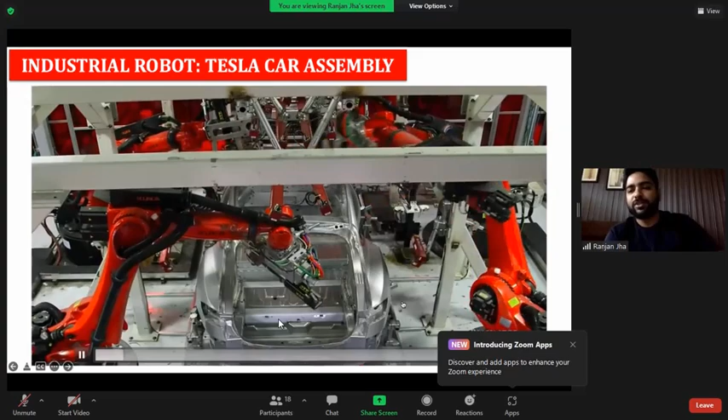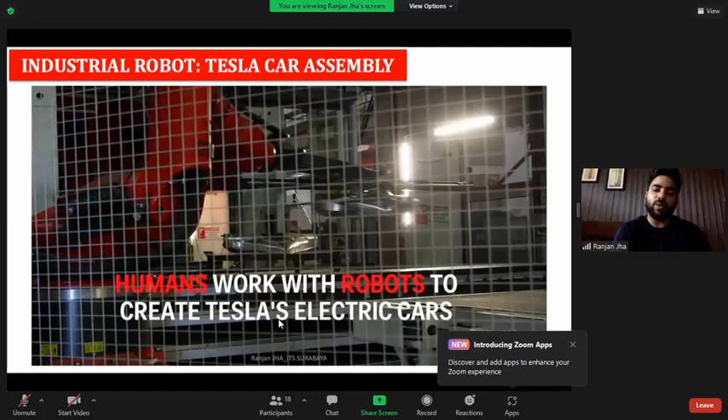So this is a Tesla car, Tesla, everyone knows, right? So this is a Tesla car assembly line. So these are the robots which are installed there for working. So this is the serial mechanism - I think you have learned a bit about this robot, the kinematics and all. So this is just to give a glimpse of what is the industrial application of the manipulator, right? So why do we install these kinds of robots in the assembly line.

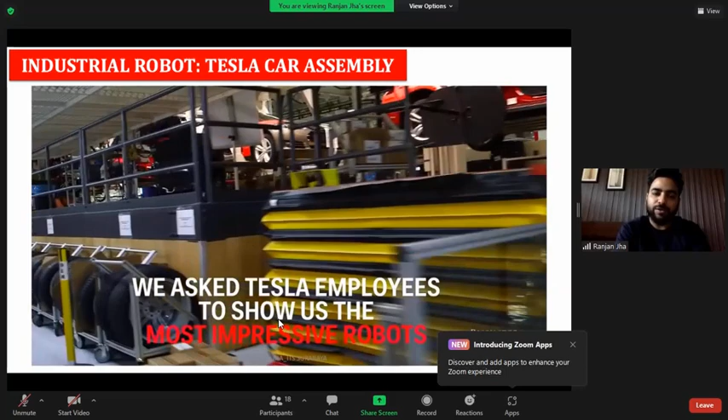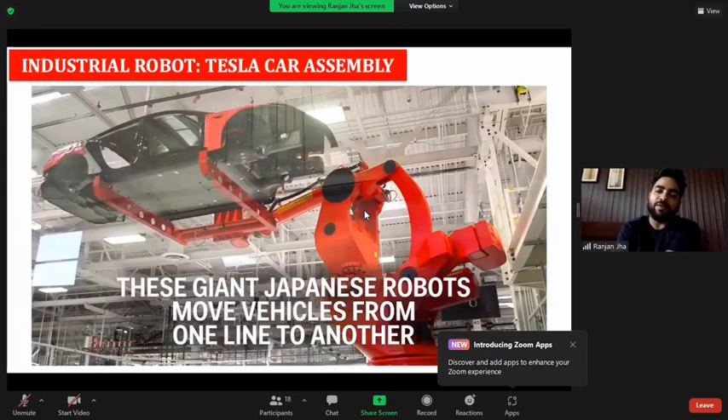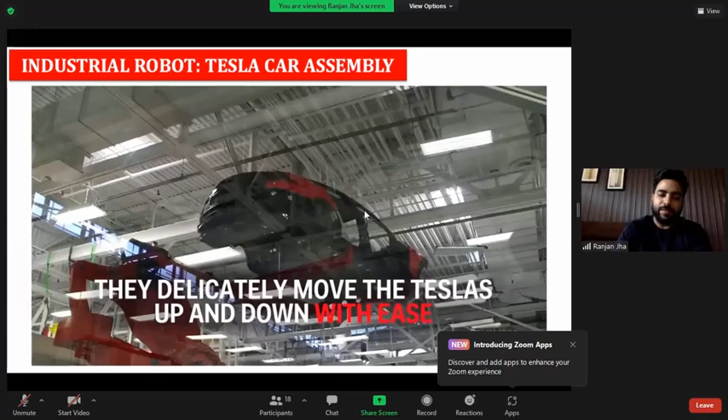So if you observe, the payload is very high, right? So it's very difficult for humans to manipulate this kind of payload. That's why we need this kind of robot. And again, in the assembly line, the company's target is to manufacture the maximum number of products, right? So these robots help to maximize the accuracy and the productivity of the industry line. So you can see the manipulation here. I'll not talk much about the serial mechanism, but we'll jump to the parallel one.

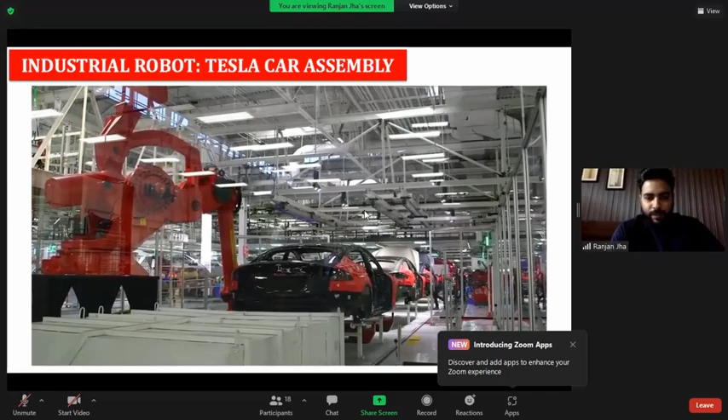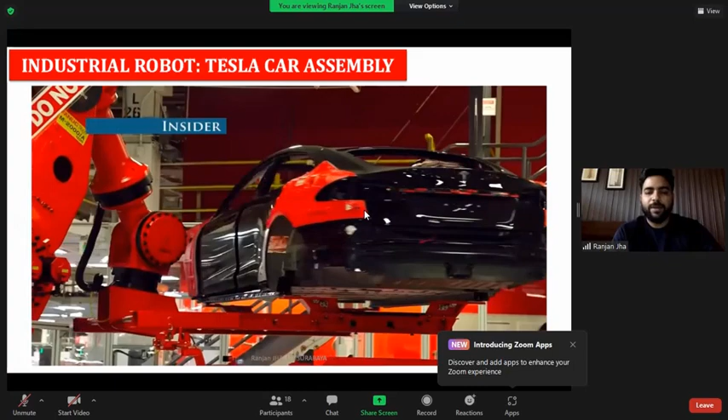So if we go a little bit into mathematics, I have added a few slides for the introduction to the mathematics behind these kinds of robots. It's very important to write the programming for any robot, and it's important to mathematically model it. I think you've learned how to model an object or system so the robot can understand it, mainly to denote a point or object in three-dimensional space. Since this is your last semester, I think you're already well familiar with these tools, so I'll skip these parts.

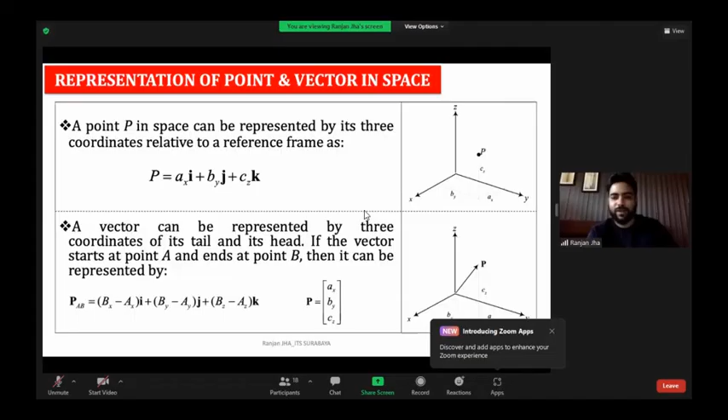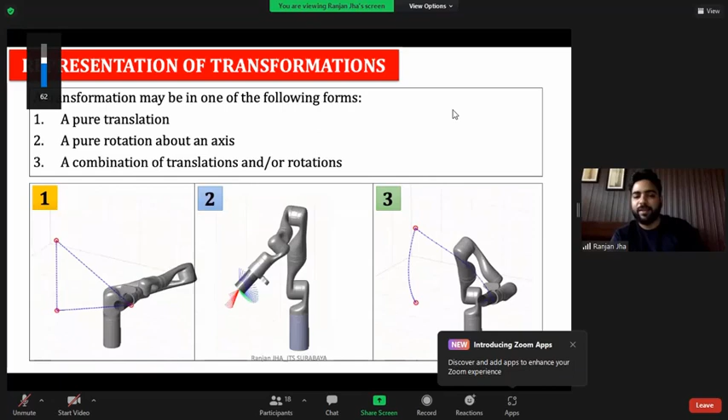So these are the three motions which give us all different kinds of motion: translation, rotation, and then hybrid motions. And then there are transformation matrices. Suppose a robot has to move an object from one point to another, so we use different kinds of matrices or mathematical formulations to model that. So don't worry about all this.

We'll directly jump to the parallel one. So before starting the parallel mechanism, I'll talk a little bit about surgical robots. You may have heard about the Da Vinci surgical system.

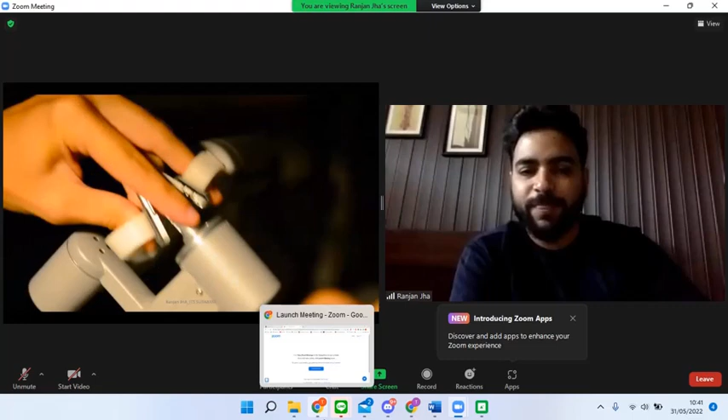This is for teleoperation—a surgeon can sit anywhere in the world and operate on a patient for different kinds of surgical procedures. So this is one kind of mechanism, and here also there is a parallel mechanism inside it. It's a hybrid, a kind of serial plus parallel mechanism. Now in many countries people are performing surgery using this device. You can see how well the hand manipulation of the surgeon is transferred to the patient side. So this is the current trend of the Da Vinci surgical system, what we have seen.

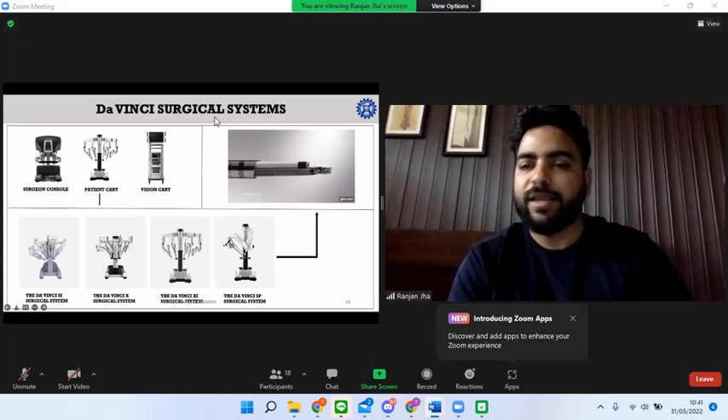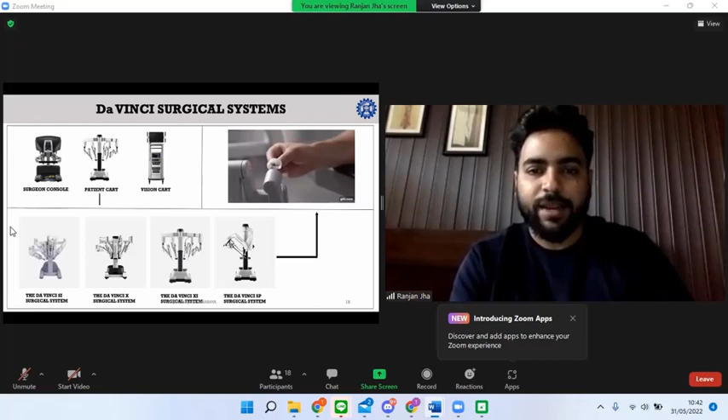But now, I've put this one—this is a snake-like robot. Before, there were 4 incisions needed to perform the surgery. Now with 1 incision, all the tools come out. So there is only one trocar, from which this kind of snake-like robot comes out and performs the surgery. This is the current trend of the surgical robot—with 1 incision, these 4 tools come out and perform the surgery. So these are a few things we are doing in the development of surgical robots.

Here, a few things—the handheld device—and I'll show you one video just to help you understand. These are a few things we have developed here in our lab with the tool also. Let me show you a video. Okay, this video is not working here. No problem, I'll show you from here. This is the surgical tools which we have developed. The video is not working, maybe I'll show you later.

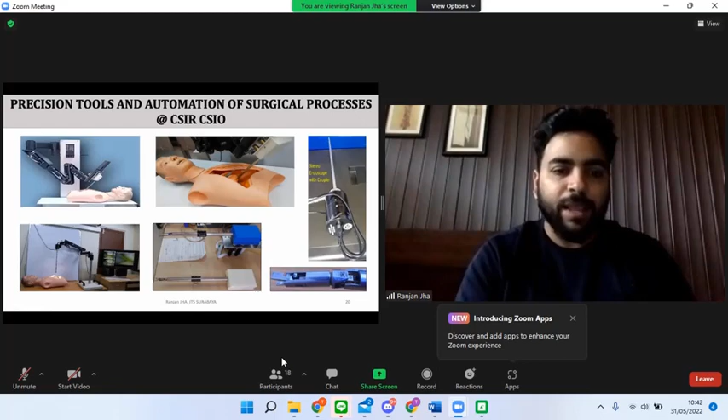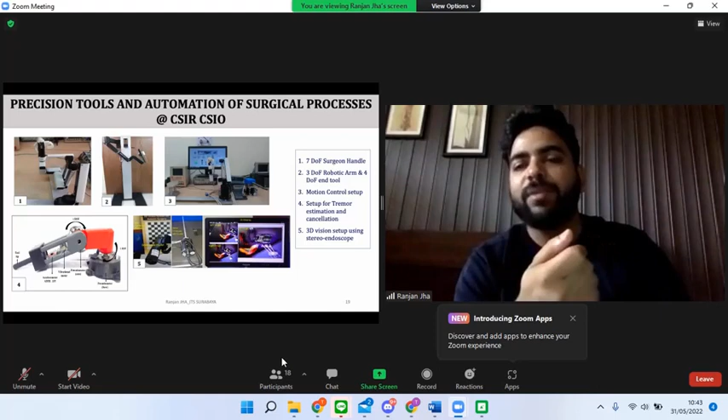So we have transferred the handheld motion to these devices—you can see in the second one, and we've also developed a fourth one shown here. While performing surgery, there is a tremor in the hand of the surgeon. It's very important to remove this—imagine if he's doing surgery and his hand moves, what will happen to the patient? So it's very important to filter out the tremor. We have developed one device to filter that tremor of the surgeon's hand. I'll show you this video at the end.

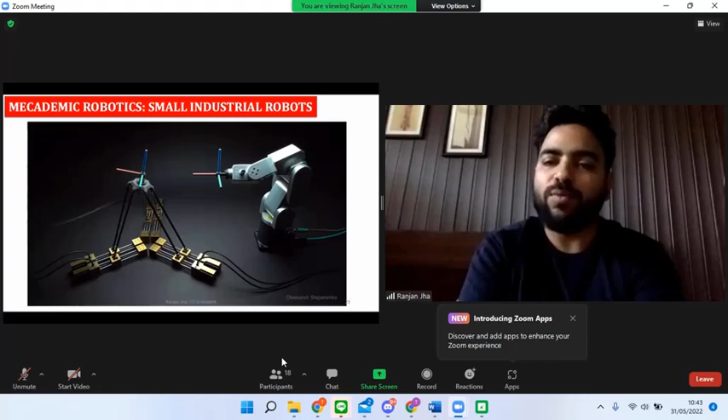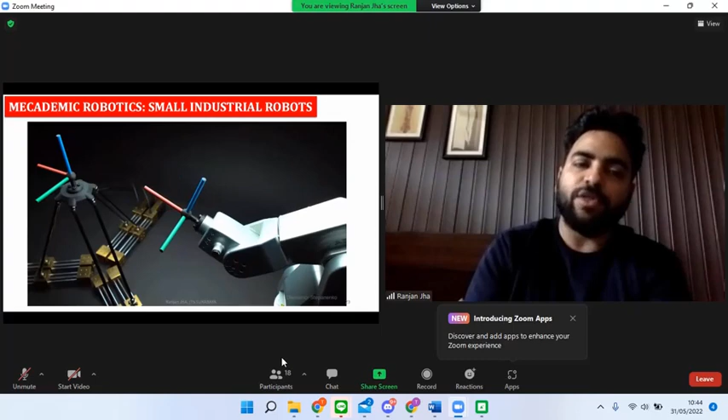Okay, so we'll start with the parallel manipulator. I'll give a glimpse of the comparison between the parallel and serial mechanisms. This is a parallel 6-axis parallel robot with linear actuator joints. In a later slide, we'll take one parallel robot and try to understand its mathematical model. You can see here the motions of the serial mechanism, and one can understand the difference between the two. Then you can think about which application suits which mechanism.

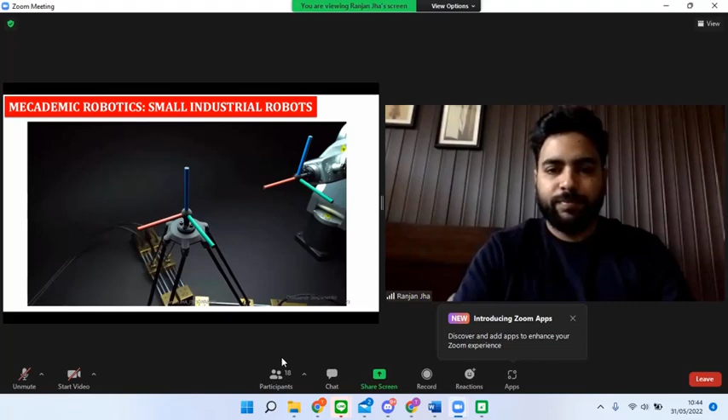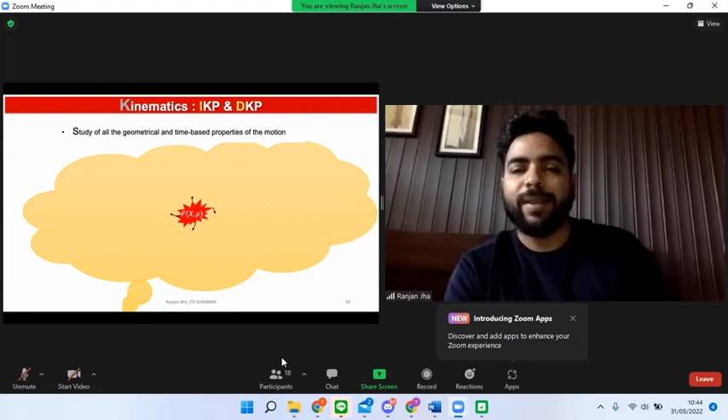Now let's try to understand a few terms before jumping into the parallel mechanism. There is something called the constraint equation—we'll see what this is. There are two important terms: the workspace and the joint space. With these constraint equations, for example, if we represent any object in three-dimensional space, it has 6 degrees of freedom—three translations and three rotations.

The set of all possible values of these variables we call the workspace. And then the joint space—you take the actuator. If you're taking a linear actuator, you can denote it as rho, or if you take a rotational one like a simple motor, you can take the angle of that particular joint.

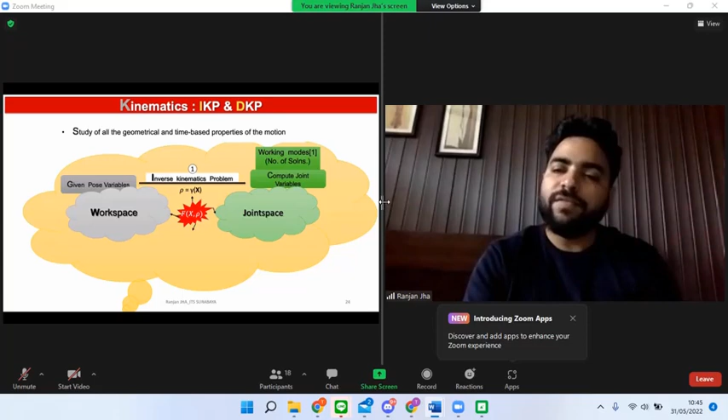So if you plot all the points of that actuator, we call it the joint space, right? For a given pose variable, for a given particular value in the workspace, when we calculate the articular variable or the joint variable, we call that the inverse kinematic problem. I think you know these terms now. In the later example, we'll see that solving the inverse kinematics will not give one solution. It will give different solutions because of the algebraic equations, right? So we call that number of solutions the working mode of that particular robot.

Similarly, for a given value of the joint, like the given value of the motor rotation or the linear actuator, when we compute the workspace, that is a point in three-dimensional space, we call that the direct kinematic problem, and the number of solutions we call the assembly mode. So these working modes and assembly modes we'll understand with an example, right? There are also singularities; we'll see that one too.

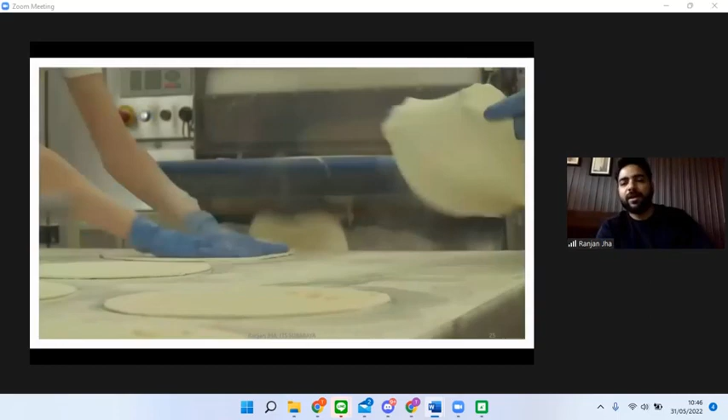So this is again one video for the parallel mechanism. Before we start, let's get a feeling for this parallel robot. This is for making pizza, right? You can see the different applications of the manipulators, the robots. This is one kind of delta robot which is used to make pizza. You can think of any number of applications for different mechanisms. This is one of them.

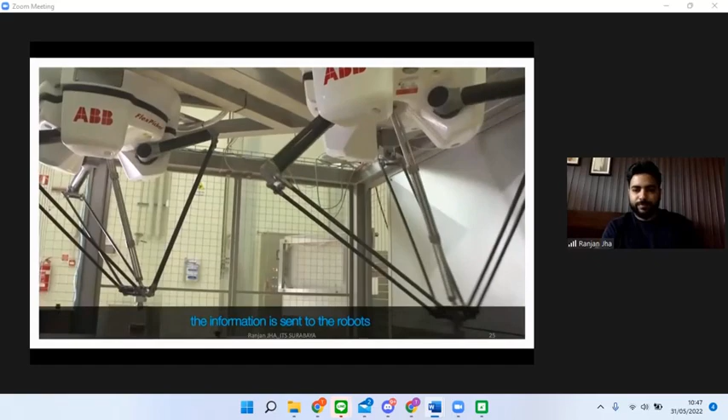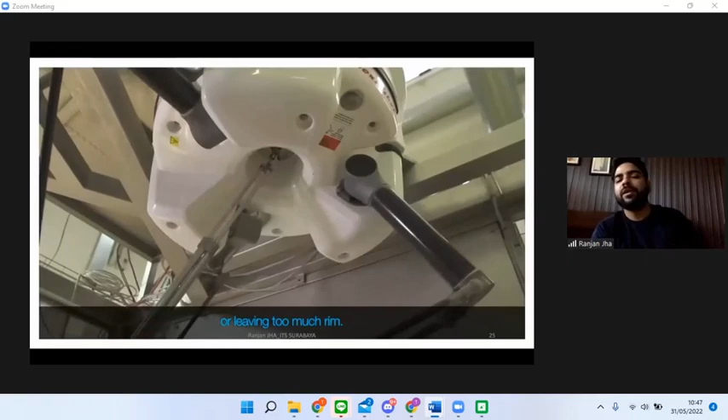So the simple definition of a parallel mechanism is: if you have more than one link connected with the end effector, we call that mechanism a parallel mechanism, right? When you have a closed loop.

Okay, so we'll just, 1 second. Okay.

So let's start with a delta robot. We'll try to understand it. Now suppose you take any three linear actuators. Just take three random linear actuators and think about how we can join these actuators in three-dimensional space. Based on that, we have formulated four different kinds of delta-like architecture. For example, suppose these actuators are perpendicular to each other. Just put these actuators on each axis, x, y, z. That mechanism we call the Orthoglide.

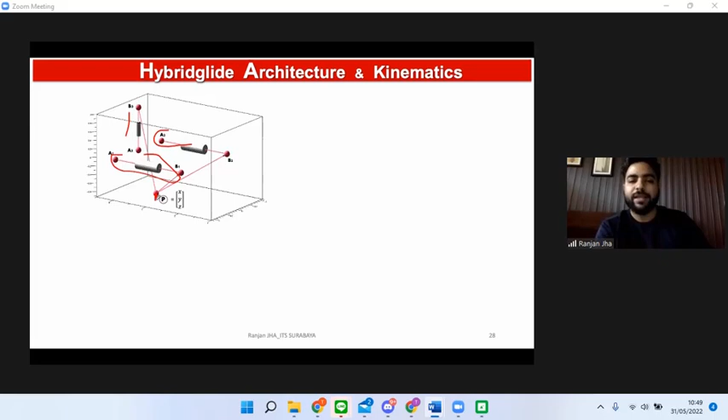So this is the end effector. For example, suppose we want to paint a surface, right? We'll fix a brush here at this point P. Now we want to model that. We want to make the kinematic model of this particular architecture. So let's start. Consider these points A1, A3 and A2. Let me show you the motion of this mechanism first. See, this is making a circle, right? These points A1, A2 and A3 are the 3 fixed points, and B1, B2, B3 are connected with the end effector, which is the moving point.

Now, how do we find the kinematic equations? If you see this point B1, if you know the point B1 and this P, you know XYZ, right? For example, let's take these values of the actuator. This is the linear actuator, right? Suppose this is rho 1, this is rho 2, and this is rho 3. This is nothing but the value of the linear actuator. Or you can take R1, R2, R3.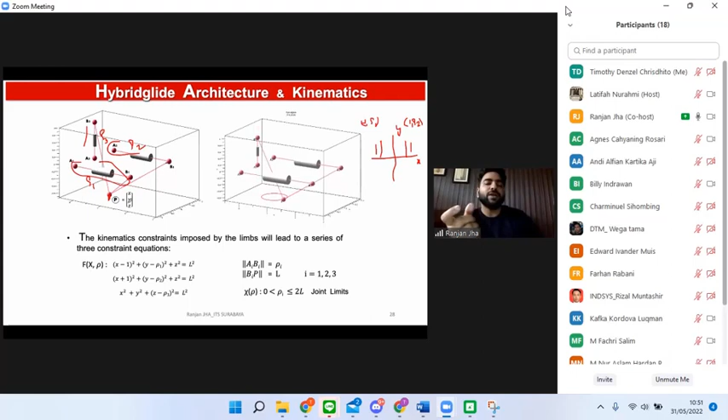So now we know these 2 points B1, B2, and we know this P as X, Y, Z. So the distance between the 2 points is what? X1 minus X2 whole square plus Y1 minus Y2 whole square plus Z1 minus Z2 whole square, and under the root, right? So with the help of these constraint equations, we'll arrive at these three equations. So this is nothing but the distance between point B1 and P. So B1P equals L gives us the constraint equation.

Now if you see here, X, Y and Z are the pose variables, right? In the last slide, when you plot this X, Y, Z, we called that the workspace. And then you have rho 1, rho 2 and rho 3. When we plot this, we called it the joint space. So X, Y, Z is the pose variable, rho 1, rho 2, rho 3 is the joint variable. When we want to calculate X, Y, Z when rho 1, rho 2, rho 3 is given, we call that direct kinematics. And when we want to compute rho 1, rho 2, rho 3 when x, y, z is known, we call it inverse kinematics.

So if you see these three equations, for example, if you know the x, y, z values, this is a circle, right? So we know the set of all the points. When we substitute these points in x, y, z, we can very simply solve these three, because now there are three variables: rho 1, rho 2, rho 3. By solving these, we can get the values of these actuators, how much we need to move each actuator to get a circular trajectory. With the help of these equations, we are able to calculate that.

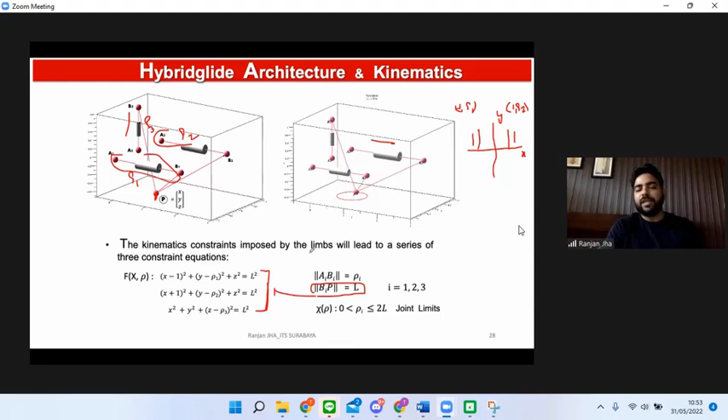Now we will go to the UraneSX. This is 3 perpendicular, but on different planes. This is very familiar, right? When you see 3D printing applications, most of the parallel mechanisms for 3D printing will be like this: 2 in the same plane and 1 in a different plane. So you can again write b1, b2, b3, and with the help of b1p equals L, you are able to write these 3 equations. So the motion is something like this. This we call the UraneSX, and the application is in 3D printing, or you can think of any different application also.

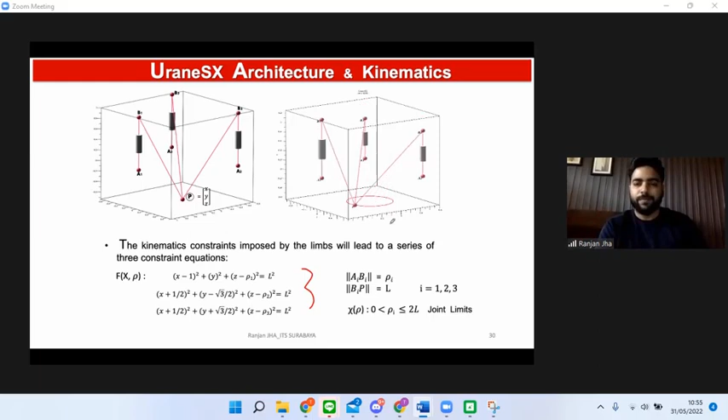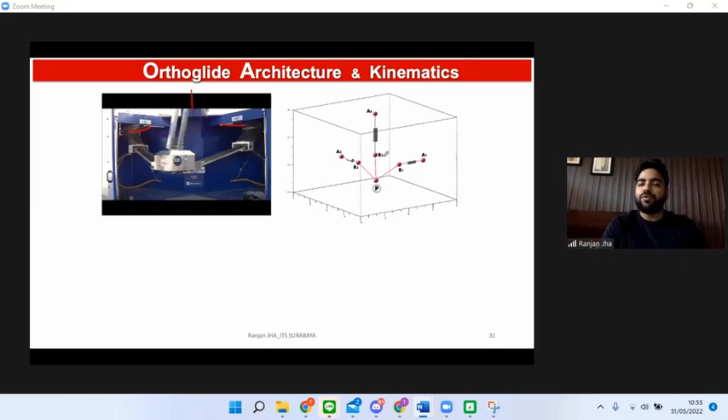Now let's go to the Orthoglide. This is a very simple one. This is one of the examples which we had at École Centrale de Nantes in France, this manipulator. When you place the actuators on the 3 axes, x, y, and z, you get this mechanism. So how to model that? The principle is again the same. You first find the points b1, b2, b3. This one is on the x, y, and z axes, so the points may be rho 1, 0, 0, then 0, rho 2, 0, and the third point will be 0, 0, rho 3. When we find the 3 points, we calculate the equation like this.

So this is a very simple equation. Here this is the constraint equation. Again, with the help of b1p equals L, we have found this equation. The points are rho 1, 0, 0; 0, rho 2, 0; and 0, 0, rho 3. Now with the help of these equations, we are able to write the inverse kinematics and direct kinematics equations. Now let's take an example to understand this, with the help of these 3 constraint equations.

What we got in the last slide. So when you find the x, y, and z from this equation, you will get these equations. You can solve this by hand also, but you can use any mathematical tool like Maple or MATLAB to compute these equations. It's not very difficult to find these equations. Similarly, the inverse kinematics, the inverse is very simple.

Now, when you compare the serial mechanism with the parallel mechanism, one can observe that here it's very easy to find the inverse kinematics for the parallel mechanism. So this is one of the advantages of the parallel mechanism, that you are able to write the inverse kinematic model from the constraint equation very easily. You can see from here. It's very simple: L square minus Z square minus Y square, under the root, then plus and minus X. So this is rho 1, rho 2, and rho 3, the inverse kinematics.

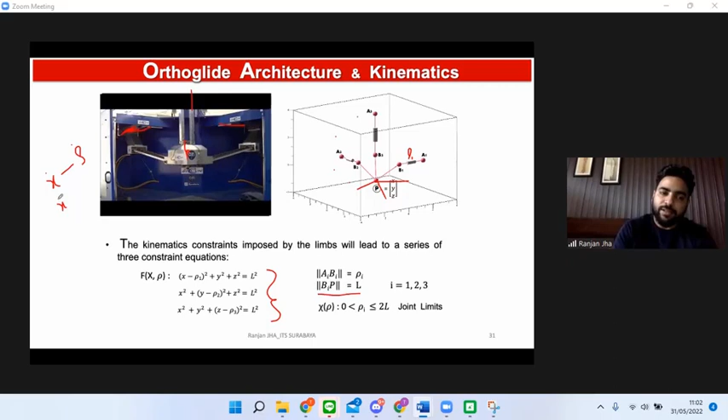Now, when you map the velocity of this actuator with the velocity of this end effector, when you map between x dot, that is the velocity of this end effector, to rho dot, that is the velocity of the actuator, or the double derivative, that is when you take one more differential, that is you are computing the acceleration, so that is double dot. So you are computing these values from here only.

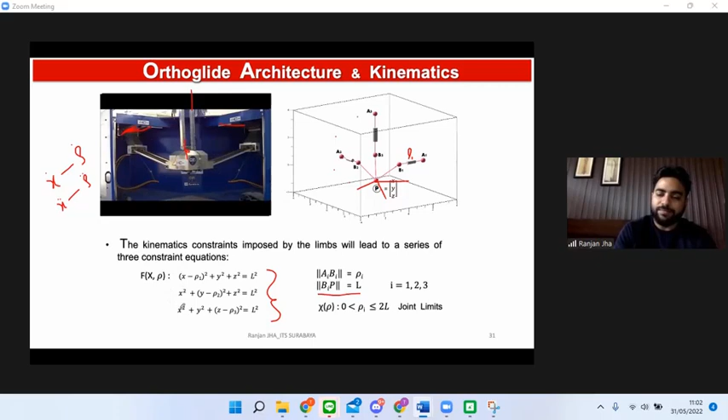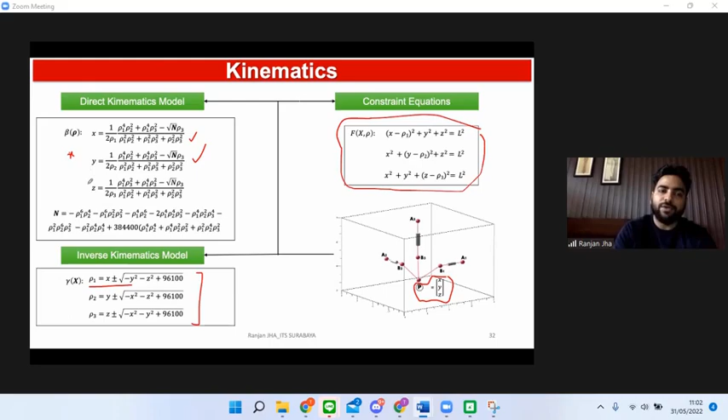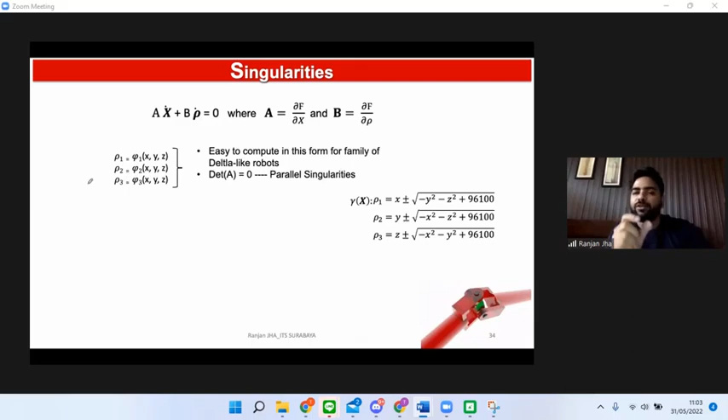So let's see this. So you know this x, y, z. So when you take the differential x dot, y dot, and z dot, we call that a Jacobian, the matrix which we use to map between the velocities of the end effector to the joint variables. Now these are the mathematical matrices. So when the determinant of that matrix becomes zero, it's very difficult to map those velocities.

That particular point we call a singularity. It's very important to know about singularities, because in parallel mechanism you can find singularities inside the workspace also. The physical meaning of this singularity is, at that particular point when your manipulator crosses the singularity, the stiffness of the manipulator will be lost. So for example, if your manipulator is moving, it will fall down. So it's very important to know that particular singularity inside the workspace.

So I'll not go much into the mathematics. For that particular robot, orthoglide, we have computed this singularity surface, which is inside the round one. So for orthoglide, it's like a sphere. Inside the sphere, you have these kind of surfaces.

So this is not the safe zone for any robot. We should give this value to the user that your robot should not move on these points. So whenever you want to make a trajectory, for example, if your robot wants to move from this point to this point, it should not move like this.

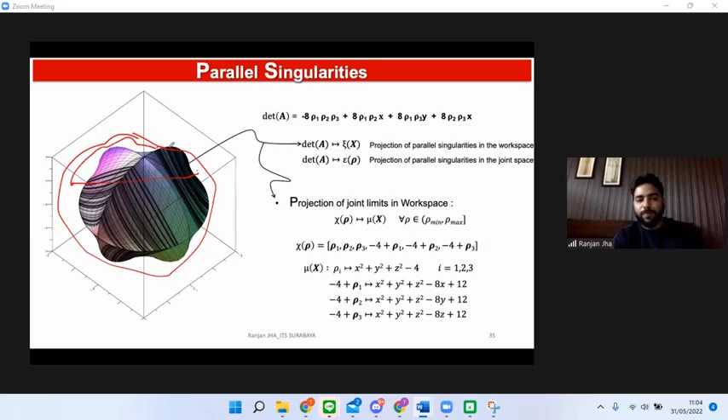So first you should ensure that it should not pass through the singularity. This is the second step in trajectory planning, which we will see also. So here, if just for the analysis, for the orthoglide, if you see the singularity in the workspace, you can see this surface and this surface. We'll see this again.

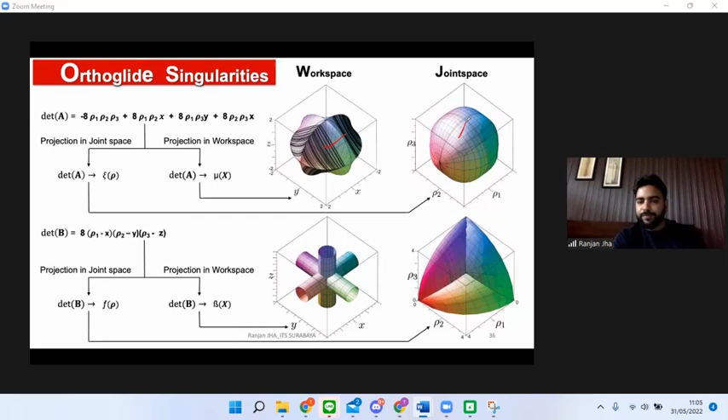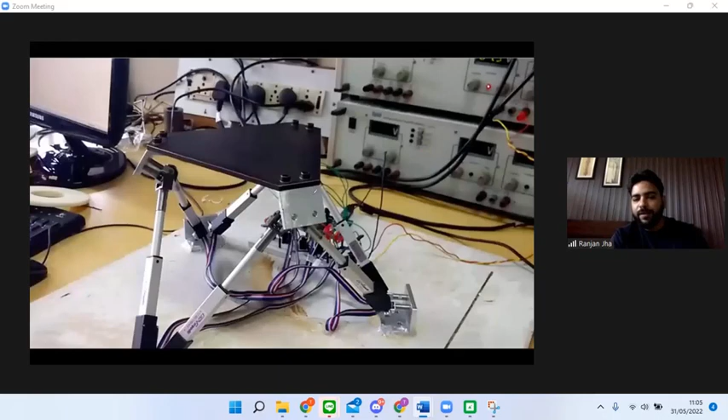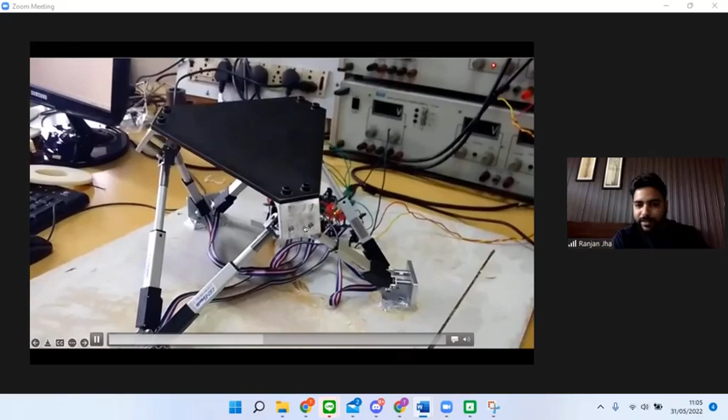Okay, so this is the video. You see, okay, so now at that point, when it falls down, it passes through the singularity. So when it passes through the singularity, you can see that here. Just 1 second. Okay, so here you can see, so when it passes through the singularity, it loses the stiffness and it falls down. That's why it's very important to know about the singular points in your workspace.

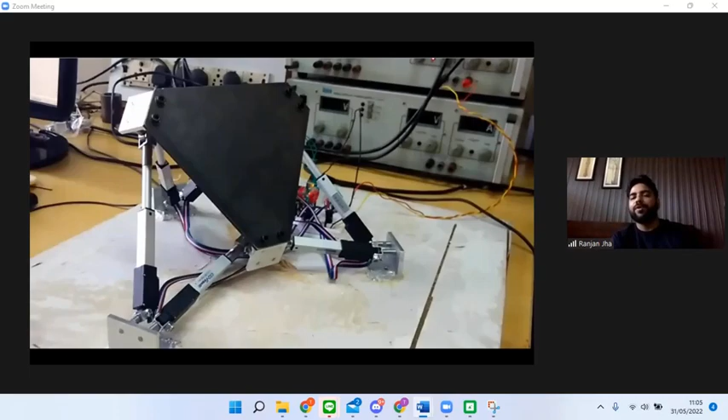Now in the trajectory, what we do, these are the parametric equations that we use to write it. I'll give you a little bit about what is the parametric equation, because sometimes you will find it useful.

So what we do, we write, let's suppose you have 2 points, A and B. This is point A, this is point B. So what we are learning now is about parametric equations. For example, let's suppose if you want your robot to write your name, the initial of your name, like an R. How does a robot know how to write the equation for this particular trajectory so that your robot will write the R?

So we are learning this now. What we do, we make a line, we take some points. For example, let's take these 2 points here, A and B. And then we define the equation. Let's suppose this point is x1, y1, and this point is x2, y2.

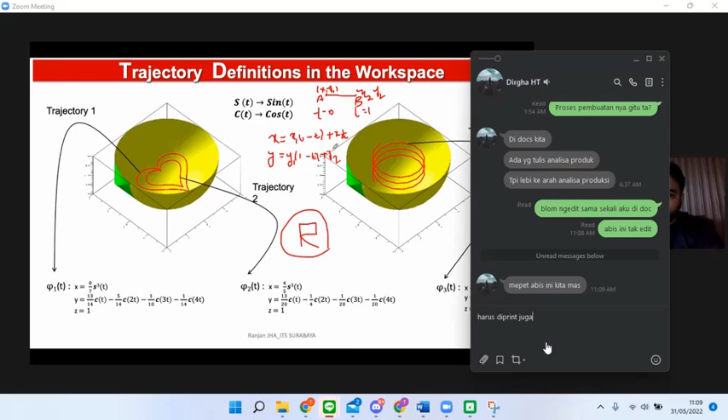So at t equals to 0, when you substitute here, what you will get? This is x2 into t and this is y2 into t. So when you substitute t equals to 0, what you will get? X equals to x1, y equals to y1. So this point, right? When you substitute t equals to 1, you will get x2, y2. So this point. And when you substitute t equals to 0.1, 0.2, 0.3 like this, you will get the set of all the points on the line A and B, right?

So this is what we call the parametric equations. So this heart trajectory, or this spiral trajectory, we are getting with the help of the parametric equations. So once we write these parametric equations, we plot this equation within the workspace and we'll see whether it is inside the workspace or not.

So you can see this trajectory. Just 1 second.

Now when we take a simple parametric equation, for example, let's say we take this simple equation, or when we talk about x equals to x1 into 1 minus t, and x2 into t. So when you take the velocity of that, when you derive it with respect to time, what will you get? You will get x dot equals to constant, right? And when you take the double derivative, you will get acceleration as 0.

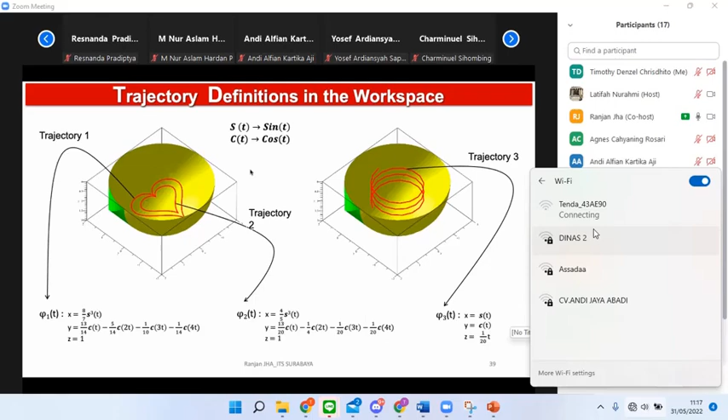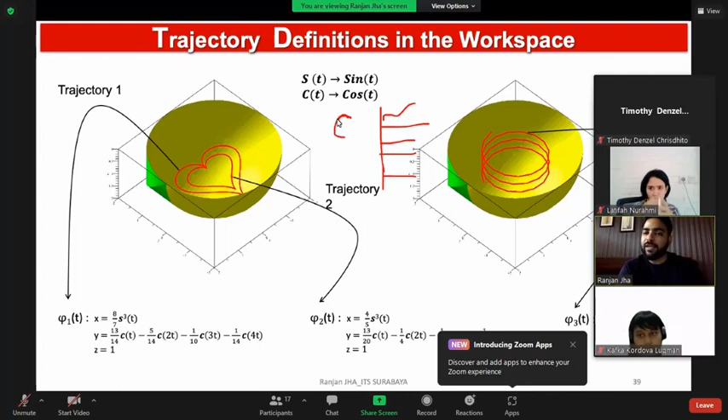Driving a car, now suppose a turn comes, you slow down your car, right? You won't go at 100 on the curve also. So that's why what you should have is a variable velocity which should change on these curves. And again, to have very good motion, if you don't want to have jerk, you should have the acceleration also in terms of variables where you can control the variable.

So what we do, we substitute this t as something called t cube, the third order, or something like the standard one. What we take: c1 t cube plus c2 t square.

So this is a standard third order equation, right? Similarly, c3t plus c naught. And with the help of those boundary conditions, like we calculate for t equals to 1, we compute c1, c2, c3, c4 for our mechanism or for a particular trajectory.

Now here you can see that when you take the velocity, what you will get? 2t square, right? Again, it will be a variable in terms of time t. And if you take the acceleration, again, it will be what? 4t. So it depends upon t.

So at this particular curve, as your velocity is again time variable, it will slow down. So what methodology are we using? We are substituting these equations with this higher order equation.

So suppose if you want to have more fine motions, what will you do? You will again increase, you will take t on the fifth order, t power 5. But again, what you have to do? You have to compute this particular variable, this particular constant, c1, c2, c3.

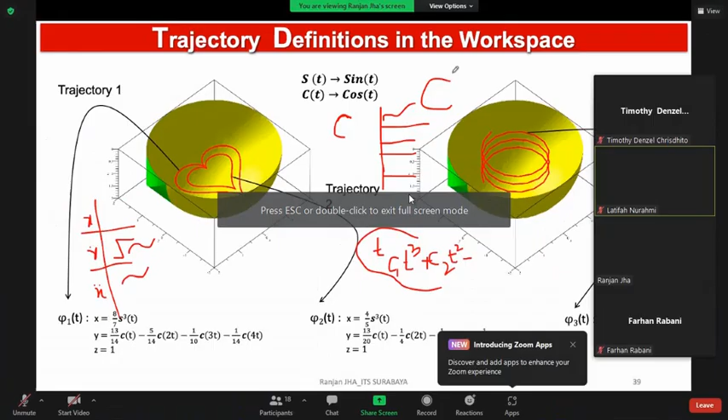So you give boundary conditions, right? Yeah, the curvature. So what we do, for example, if we want to write this particular c, we write our initial velocity or the initial position x, we know it. Now x dot, we are putting x dot here, that in the curve it should be 20, for example, it should go to 20. So in the equation we substitute 20, and with different boundary conditions we'll calculate c1, c2, c3. And when you substitute c1, c2, c3, at this particular point you will always get 20, the speed. So you can set your speed on different curves.

I'm just curious whether for mobile robots the same trajectory generation method applies. No. For the mobile robots, or for aerial vehicles or any different things, the base is again the same. We are taking the higher order equations, but we are using different algorithms because it's very difficult to compute these values in real time.

So this is basically for milling type operations, where you offline compute the trajectory, satisfy it, and then reproduce it. But we are using different advanced algorithms for the real-time one. But again, for those algorithms, the base is the same. We are taking the higher order, but an optimized one, where your computational time is less.

Okay, but it's still third order, fifth order. Okay. All right, it's clear. Is there any other questions?

I have questions about those hybrid glide, orthoglide, and Urane SX. What are the drawbacks and advantages? From what I've seen, they can follow the same algorithm.

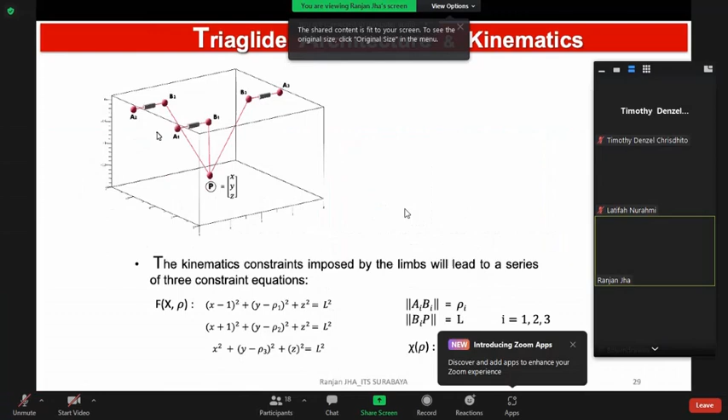Space inside that. So you will always go for this Urane SX, you can't achieve this kind of manipulation with this one. So these have different workspaces. After seeing the workspace, you can very easily find which application you can select the triaglide or hybrid glide or the orthoglide for.

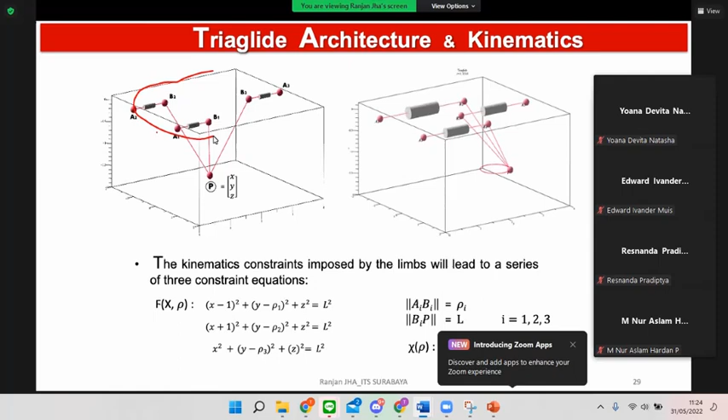It depends on the workspace size. For the orthoglide, since all three axes are perpendicular, the workspace is a sphere, as we have seen. So if you want a spherical workspace, you can go for the orthoglide. The workspace looks something like this sphere.

Again, we have to check for two things, not just one. We have to check for the singularity also, and how much efficient workspace you need, in which directions. So this is like a sphere for the orthoglide.

So this workspace you generated, is it bounded by the singularity or by the joint limit? It's both. This is the simple one which I put here, but we actually computed adding the joint limits also and the singularity also. Both computations are done, but I didn't put them here. I can share the results with you. So at last what we have to put are the joint limits also and the singularity also, to give better information about the workspace.

You made this in Maple? Yeah, in Maple. Nice one.

Is there any other questions from students? One more question, more technical.

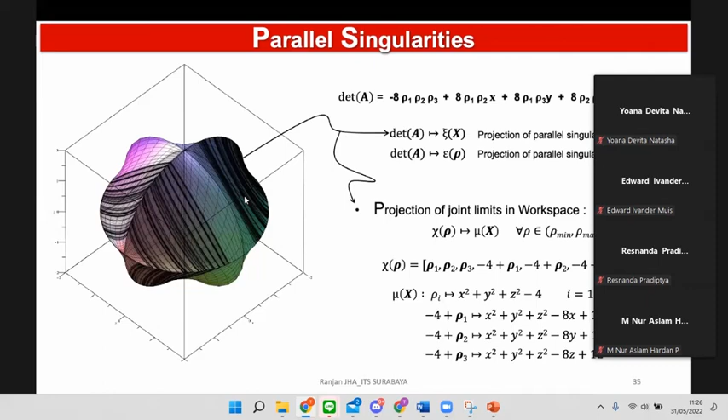Your surface, the previous one, in your previous slide, maybe about joint space or workspace. Which one? With the trajectory or the singularity? This one. So this is a surface of a parallel singularity? Yeah, this is the surface of the parallel singularity, for the orthoglide. Yeah, this is for the orthoglide.

If you see this image, you have the projections. This is a parallel singularity projection in the workspace, and again the projection in the joint space. You give a joint limit for this? Yeah, for this we have given the joint limit. And this, if you see, this is the serial singularities in the workspace.